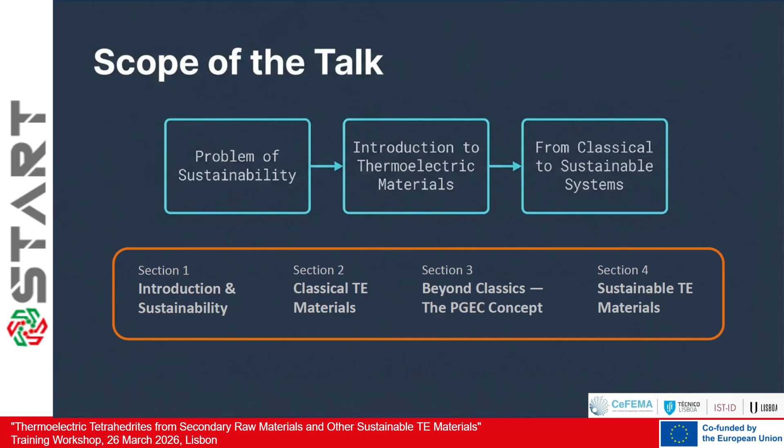So I'll give a small introduction to thermoelectric materials, really small because everybody knows about thermoelectric materials. And then I'll speak about going from classical to sustainable systems. And to do that, I divided this talk into 4 sections. The first one will be the introduction to the subject and to sustainability. Then I speak about the classical thermoelectric materials.

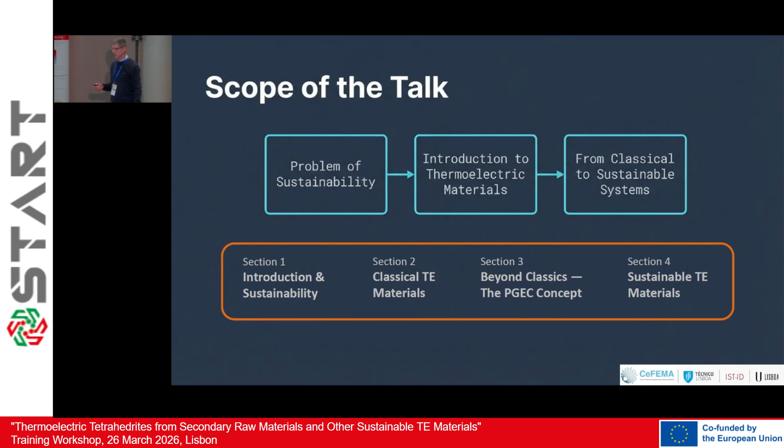Then I go beyond the classics, in particular with the phonon glass electron crystal concept that was really something that made the change. And finally, we will reach the sustainable thermoelectric materials. So, what about sustainability? What about the introduction? So, what we all want, for everything, is to have a sustainable development.

And for that, there are 3 main areas, which are the economy, the environment, and the society. Actually, the environment is the basis of everything. So we don't want to destroy our environment. We want to keep it. But we want to have economic growth to develop and give better conditions to the society. And this is quite hard, okay?

Because if you want to increase the growth of the economy very much, sometimes it collides with the environment, you destroy the environment. So we must be careful with these 3 areas if we want to have a sustainable development. And what about thermoelectrics? What can thermoelectrics give to that? Is it possible to connect thermoelectrics to this sustainable development?

Yes, in principle, yes, because one of the big problems of our development, of our society, is energy. You can feel it now, okay? Actually, most of the energy produced is still from fossil sources, something like 80%. So we have a problem of energy. And in fact, most of the energy produced is just thrown away as waste heat.

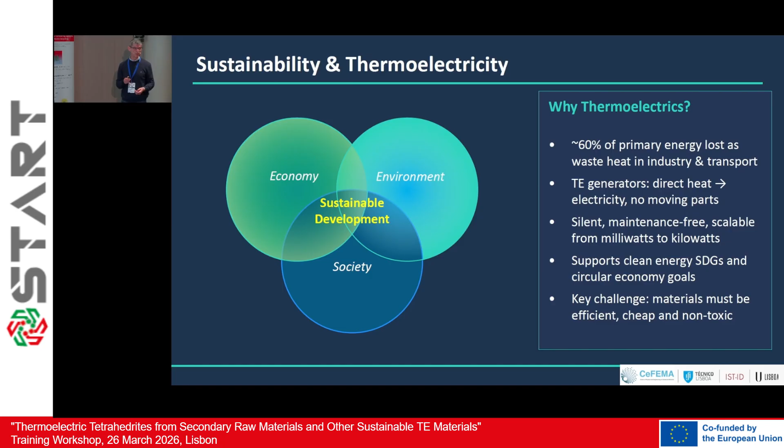So there are a lot of advantages, but there are also big challenges. One is the efficiency, of course. The efficiency is typically low. But also on the materials side, if you forget about the efficiency, which is low, as I said, the materials must be efficient, cheap, and non-toxic. So this is the problem. Okay? So let's look a little bit deeper at the waste heat.

If you look at that, you can see that there are different types of waste heat depending on the temperature. Most of the waste heat is at low temperatures. Something like between 45 and 50% of the waste heat is up to 300 Celsius. Basically it's chemical industries, houses, even the cement industry has a lot of heat losses in that region.

And the second one, at temperatures above 500 Celsius, is around 30 to 35% of waste heat, and you can see all the metallurgies are there. So if you really want to profit from that, the ideal is to profit from all of them, but it's necessary to have different types of materials. In our case, we have concentrated more on low temperature materials, which means up to 200, 300 Celsius waste heat losses.

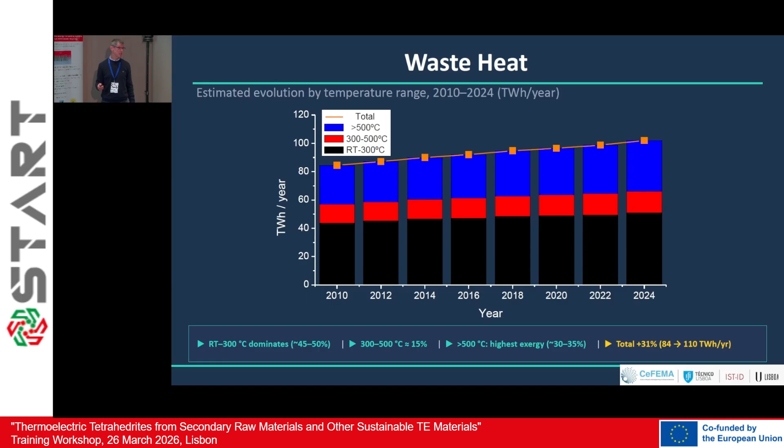So, concerning the potential of thermoelectricity for sustainability, as I said, something like 60% of the energy produced is wasted as waste heat, and this gives something like around 100 terawatt hours per year of losses. So it's huge. If you really think that it will be possible to profit something from that, even 1% or 2%, it's a lot. It really signifies something, okay?

And in fact, what we have now is figures of merit quite reasonable, I'd say. So for these sustainable materials, we have ZTs above 1, which, as you will see, even for classic materials, is what you usually get.

So we have, in terms of sustainability, the industrial waste heat recovery. We have several industries that have a lot of losses, but also the automotive and transport facilities. They have a lot of waste heat losses, in particular the internal combustion vehicles, which are still a lot of the vehicles that we have. Okay, forget Europe. Europe is a good example, I would say. Norway is a very good example in terms of electric cars. But if you go all around the world, we still have a lot of internal combustion vehicles. And these have a loss of 65% of energy.

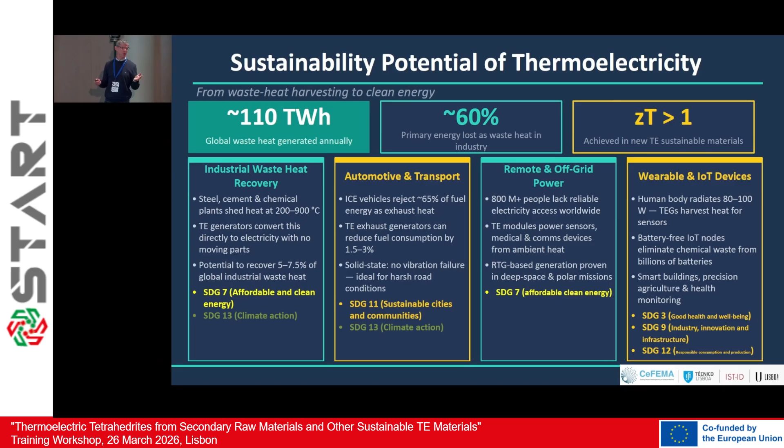Okay, so let's look at the thermoelectric module market and the evolution of the thermoelectric module market. You can see that the big part is still cooling at the moment. Cooling still dominates the thermoelectric module market, and this is okay because it was really very used for medical applications, for cooling of electronic devices, and this is still a big part.

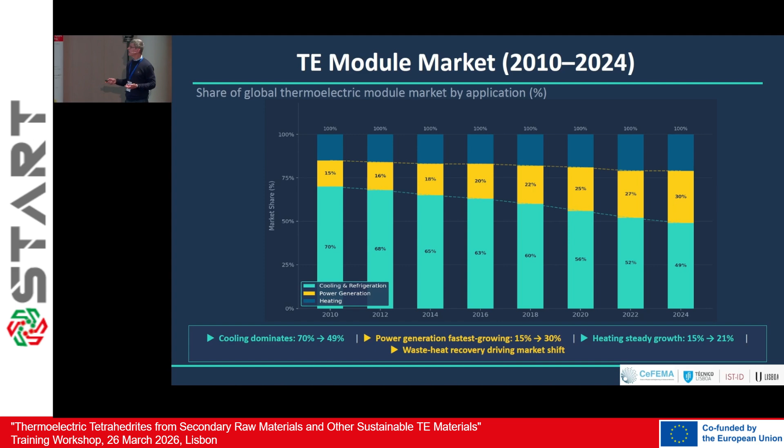So this is decreasing in percentage, but it's not decreasing in absolute values, because the module market is increasing really fast. But what we can see is that power generation is really fast growing, in particular because of the Internet of Things and wearable things. Well, not so much wearables, but in particular the Internet of Things. Okay? So it looks like thermoelectricity has a role, or can have a role.

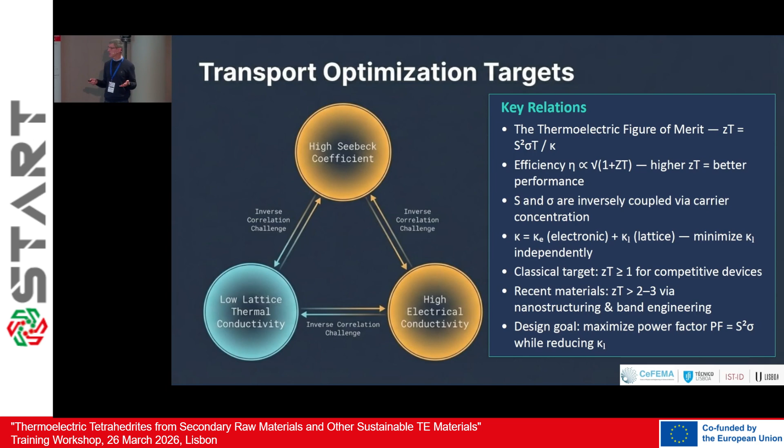But as you know, we have problems in terms of thermoelectric materials and devices, because thermoelectric materials are challenging to develop. There are inverse correlations between Seebeck coefficient and electrical conductivity, between electrical conductivity and low thermal conductivity, and between high Seebeck and low lattice thermal conductivity. So they play against each other, basically. To have it really working properly is not easy. But even so, it's possible to develop some materials that are good thermoelectric materials.

And this led us to the classical thermoelectric materials, which were developed until the 60s. There was a lot of work in the 50s and the early 60s by many groups, from America, from Russia, from Australia. And this allowed the development of relatively good thermoelectric materials by using different strategies. For instance, by optimizing the carrier concentration to the optimum value, something like around 10^19 per cubic centimeter, that really maximizes the power factor. And for this, it was possible to identify lead telluride and bismuth telluride as good thermoelectric materials.

Then also playing with the band gap, because all these materials are semiconductors, and optimizing this band gap, it was possible to maximize the power factor and to avoid bipolar conduction. In this case, also bismuth telluride, lead telluride, but also silicon germanium alloys were identified. Multi-valley band structure increases the effective mass, so increases the Seebeck coefficient, and in particular lead telluride was identified. Then also the high mean atomic weight reduces the thermal conductivity, and lead telluride and bismuth telluride are good examples.

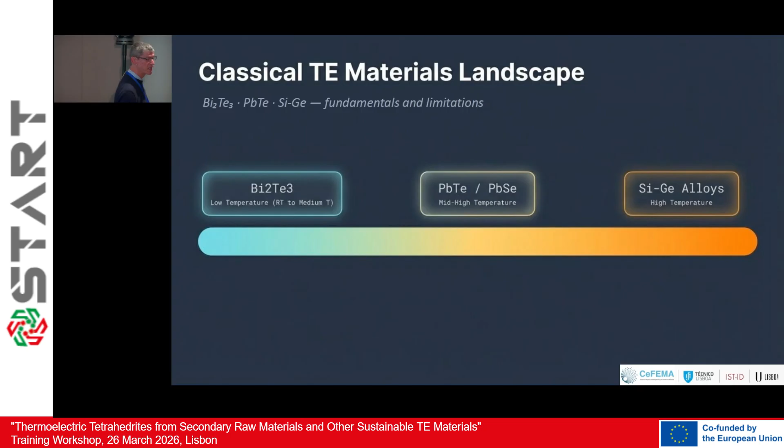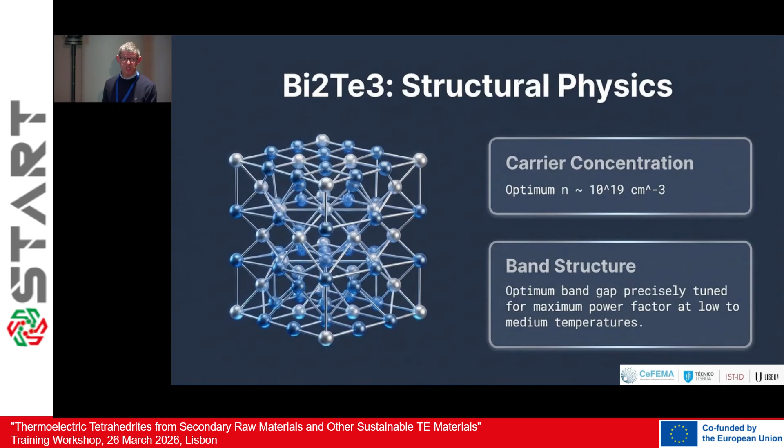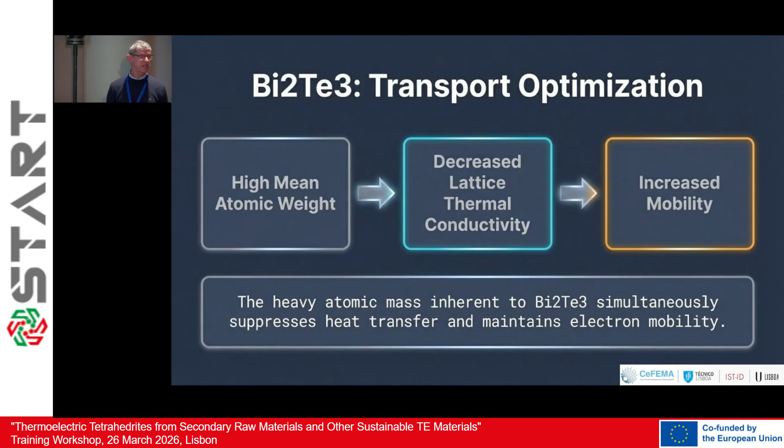Now looking a little bit deeper at each one. Bismuth telluride has a good carrier concentration and, as I said, an optimum band gap, which was possible to tune by changing the composition. It has a high mean atomic weight, which decreases the lattice contribution to thermal conductivity and does not affect the mobility so much. So it was good in this sense.

But it has a layered rhombohedral structure. It is a van der Waals compound, which means it is composed of layers. Within each layer the atoms are strongly connected, but between the layers the chemical connections are quite weak. So mechanically it is not really the best because of this.

So good band gap, high carrier mobility, and one thing which is very important: by changing composition, by doping, we can have N and P. So we can have both types of semiconductors, which, as you know, for devices is really an issue. We need both if you don't want to develop single-leg devices. We can reduce the lattice contribution to thermal conductivity. So they are quite good for Peltier coolers, but also for low to medium temperature range waste heat recovery.

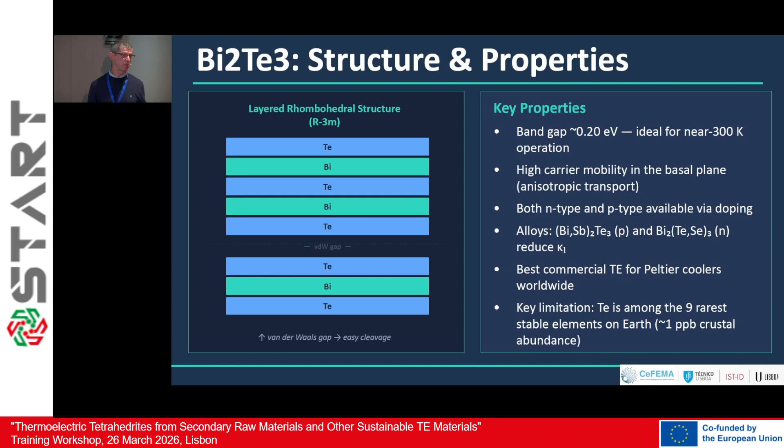But there are key limitations. One is the mechanical properties, as I said before, because the structure is quite anisotropic, and in that plane it is really brittle. And it has a lot of tellurium. Now it is not a big problem because tellurium is not used, it's just a waste of the copper industry. But for a broader use of these kinds of materials, it's a problem because it does not exist, point, okay?

So, lead telluride. As I said, it has a multi-valley band structure, is also a semiconductor, and it changes with temperature, so it remains close to the optimum band gap when you change the temperature. And we can make an alloy between lead telluride and lead selenide; chemically it remains basically the same, but you can decrease the thermal conductivity quite strongly.

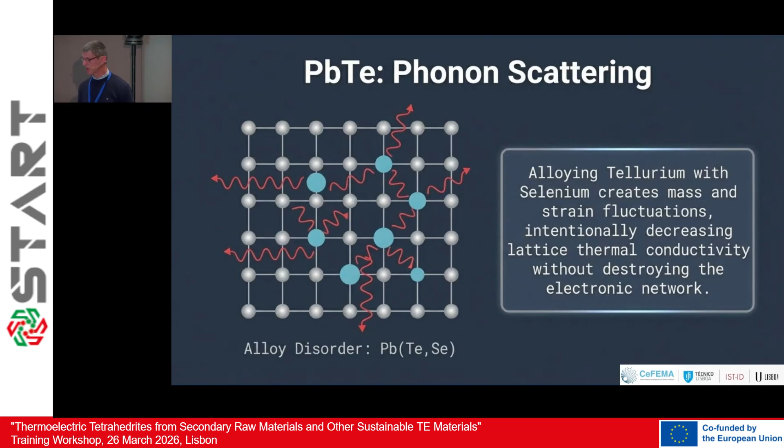It has a cubic structure, so this is good in terms of anisotropy. You cannot say that it's isotropic, but it's the least anisotropic that you have. As key properties, the best performance is between 700 and 900 Kelvin, so it's for this medium temperature range. It has a good gap and can be N-type or P-type, which is also very good in terms of coefficient of thermal expansion, because you are just playing with one material if you make a device.

So there is this band convergence, and one of the problems is the thermal conductivity, which even after alloying can be not so small, but by nanostructuring it can be really decreased, and in fact ZTs higher than 2 were obtained. I have doubts that we can keep it for a long time. That's another problem, but okay, for publishing an article, it's okay.

Again there is a critical limitation of tellurium and a critical limitation of lead, because, as you know, in Europe lead is considered highly toxic, and it's banned from many applications. Okay.

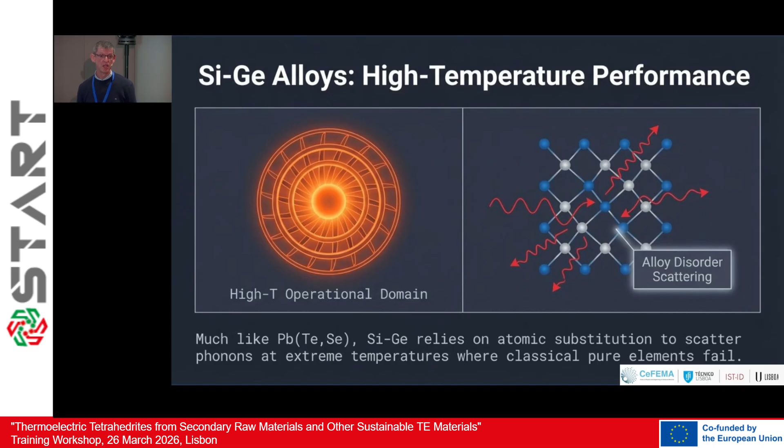Finally, silicon germanium. This is for you. Silicon germanium is really very good for high performance. They are alloys, so the alloy disorder causes scattering and reduces the thermal conductivity. If you measure the thermal conductivity as a function of composition, you can see that the minimum is in the middle, 0.5, 0.5, because of disorder, of course. And it's for high temperatures.

It was really very successful in a very niche application, which was radioisotope thermoelectric generators. This was a big success. You probably heard about the Voyagers, these spaceships that were sent far, far away. Voyager 1 has been outside the solar system for a while, and it's still working.

If you want energy sources to send these spaceships far away from the sun, you cannot use solar energy. The best possibility is to use these radioisotope thermoelectric generators, and they should be really very reliable, because if there is a problem, you cannot go there to solve it. In the case of Voyager, Cassini, New Horizons, these are tens of years without any problems and still working.

So this was based on silicon germanium. Now there are attempts to use other types of materials, not so successful. So I think that NASA is returning again to silicon germanium. And in the case of silicon germanium, the fact of alloying silicon with germanium decreases the thermal conductivity. So there is the operation range at high temperatures. And again, we can, by doping, have a p-type and an n-type semiconductor.

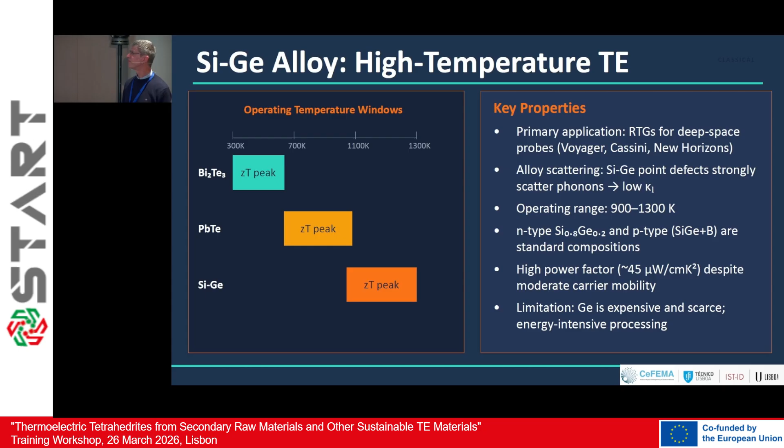The power factor can be very high, and usually it's very high. And the thermal conductivity is low, but not so low. And the main problem is the price. Germanium is an issue, because germanium is very expensive. So I know that there are attempts to decrease the content of germanium, keeping the properties. So this could be one possibility for high temperature applications, still, actually.

So we have several limitations for the classical thermoelectric materials. One is the toxicity, okay? Lead is toxic, but also tellurium is toxic. Bismuth is not so much, but lead and tellurium are not so good. The scarcity: tellurium is rare. Germanium is also rare, okay? It's not so available. The high cost: 1 kilogram of bismuth telluride is around $100. But if you go for silicon germanium, it's almost $700 per kilogram. So the price is quite large.

And then there is the need of processing, in particular for bismuth telluride. It's necessary to do zone refining to have a strongly textured material, because of these anisotropic properties, or even single crystal. Actually, the single crystals are the best ones, but are also the most expensive to prepare, and in terms of mechanical properties are also not exactly the best. So bismuth telluride, which is the most widespread classical thermoelectric material, is brittle.

And finally, supply chain. Bismuth, tellurium, germanium are classified as critical raw materials by Europe and by the United States. Okay, so we have problems, and that was one of the reasons why thermoelectricity did not explode. Price is high, there are problems on supply chains, and of course, the efficiency is also not so big. But if we can reach a very low price, it's a question of price. If we got the same kind of properties of these classical thermoelectric materials, but at much lower price, that would be one step to solve it.

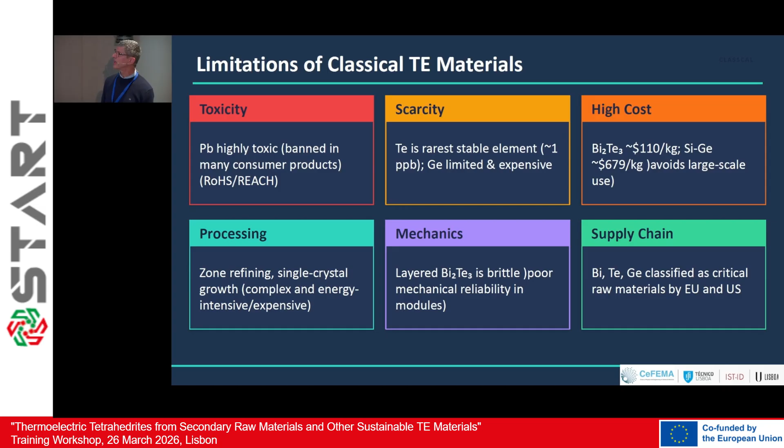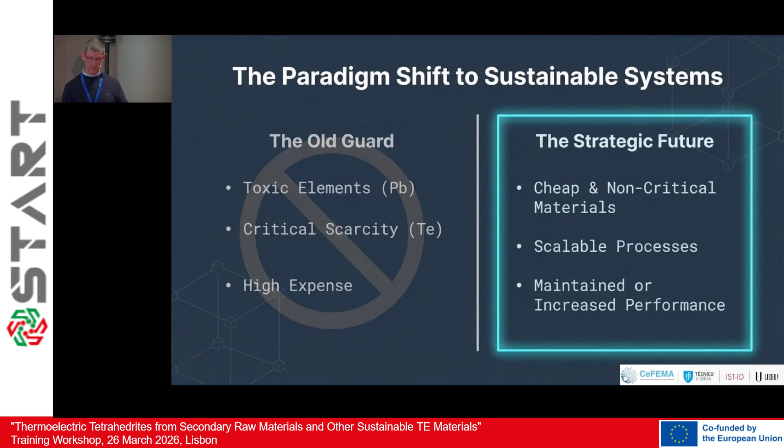So we have these old guard thermoelectric materials, and we want to go to the future thermoelectric materials, which means cheap, non-critical materials, scalable processes, and either maintain or increase the performance of those materials. And in fact, for a while, there was the discovery of these three families of thermoelectric materials: bismuth telluride, lead telluride, and silicon germanium. And for something like more than 30 years, it was kept like that.

But in the middle 90s, there was one guy, Slack, that came with the phonon glass electron crystal concept. And this was really something that changed things in thermoelectricity. Basically, he came with the idea of having materials that behave for phonons as a glass, but for electrons as a crystal. So basically, they tried to find materials where it was possible to decouple electronic and thermal transport, and where some atoms could rattle in cages. So there are some strategies like cage filling, complex unit cells or solid solutions.

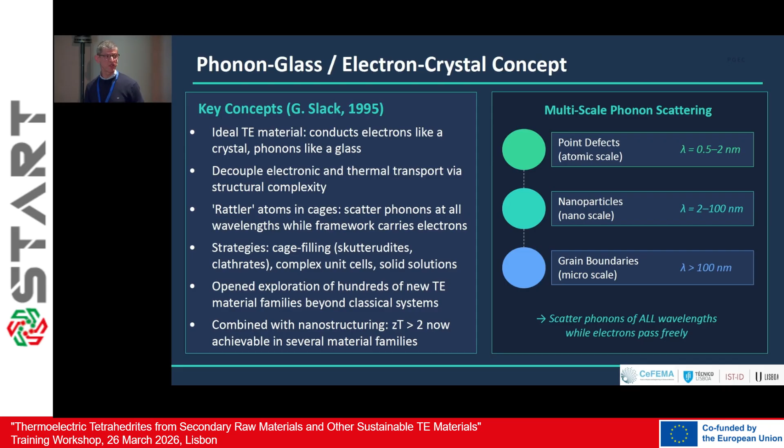And in fact, this opened the exploration of many other types of materials, and many materials were discovered after that. And also nanostructuring came into the room, because many new technology advances in nanosystems appeared in the 90s. Moreover, there was the idea of multiscale phonon scattering, from point defects until grain boundaries, in order to scatter phonons with different energies.

So I'm just going to present here two examples. The example of skutterudites, which are indeed really being developed as devices. The skutterudite is a cubic structure. It's a cage type structure where you have in the middle a big void. In the empty skutterudite, this void is empty. Skutterudite is also a mineral. So this is the empty one, cobalt antimony 3, CoSb3.

But this void can be filled. And like that, you can reach a composition of RM4X12. And this atom, which is in the void, is not strongly connected to the other atoms, and that allows it to rattle inside that box. And with that, it was possible to reach quite good figures of merit, ZT around or higher than 1.5.

But there are several limitations of this. One is it relies on antimony. Antimony is not so bad as lead, of course, but it's not exactly the best in the world. And actually, the best rattler atoms are rare earths.

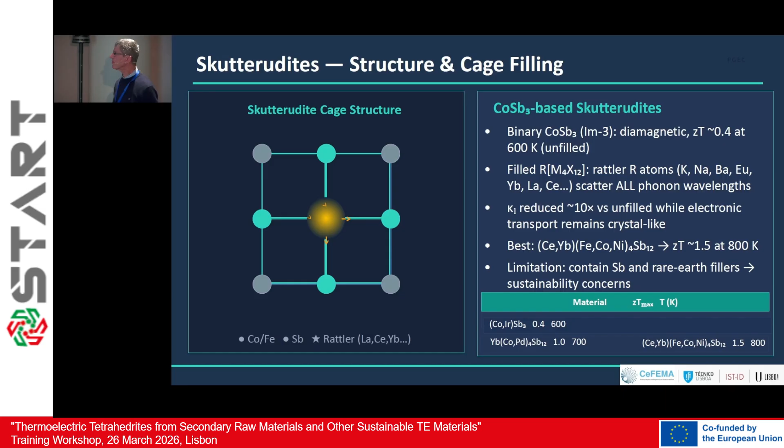Okay, the second family that I want to speak about is Half-Heusler. These are basically intermetallics, which are also cubic and are based on two sodium chloride structures, one inside the other, where in one of the structures just half of the positions are occupied. And that opens a gap, and even if you think that it's an intermetallic, it's a semiconductor.

So vacancies in one sublattice open a band gap, so it becomes a semiconductor. And this has a quite high effective mass, which means it has a quite large Seebeck coefficient, and the best results are also with figure of merit higher than 1.5. The power factor is quite reasonable. The thermal conductivity is not so big, but we can decrease it by nanostructuring. And again, I have some doubts that we can keep this nanostructure for a long time.

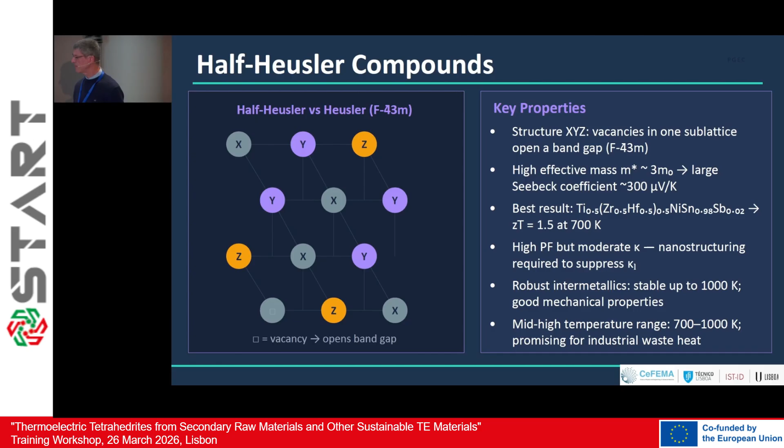So it is basically for the mid to high temperature range in terms of application. So it's promising for replacing lead telluride. Okay? But we want more than that. Actually, we want to go to something that is a viable thermoelectric, which means a high ZT, but also based on earth abundant elements, non-toxic and stable. Okay, this is what we want.

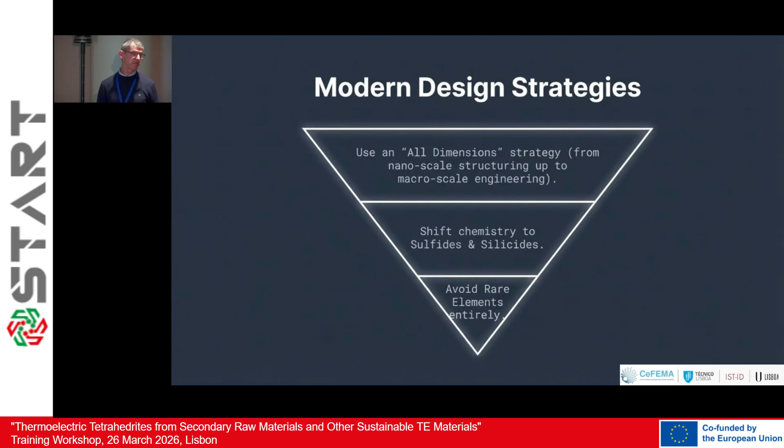If we really want to go to sustainability, we need to go to that, and moreover, something that can be recyclable. Of course, we can continue using the strategies that were used to develop all these classical and new types of materials, like for instance the all dimensions strategy, but shift the chemistry to really spread elements like sulfides and silicides, and for sure avoid rare elements or elements that don't exist so much.

So if you want to go to a sustainable thermoelectric material, we want to have a high ZT to be competitive with the existing materials. We want these materials based on earth abundant elements with at least 100 ppm. Well, it's a limit, it's a number. Non-toxic, so we don't want it based on lead or mercury or cadmium, elements that are really not so good in terms of toxicity.

Low cost, so the raw material is affordable for industrial scale. And of course, the process of preparing should not be too complicated, quite simple in order to be scalable. And of course, the materials should be stable. You cannot just use it once or for half a year and then it's dead. Okay, so this is what you really want.

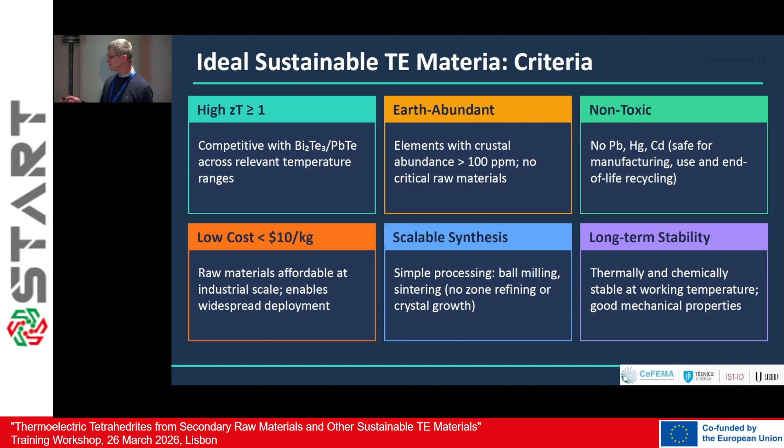And let's start from the elemental abundance, considering silicon as a reference. Silicon exists all around. There are a lot of silicates, quartz, whatever. It's really abundant. It's not as abundant as oxygen, but it's really abundant. So let's take it as a reference and look at other elements that can, in principle, be used for thermoelectricity. Let's look, for instance, at magnesium.

Magnesium is perfect. There's a lot of magnesium in the crust. But also iron. Even copper and sulfur are not so bad. Of course, if you put some antimony there, it should be a minority, because there is not so much antimony in the crust. But avoid bismuth, completely avoid tellurium, and you need to avoid lead, because at least in Europe you cannot use it, forget it. So we have here several elements that can be used.

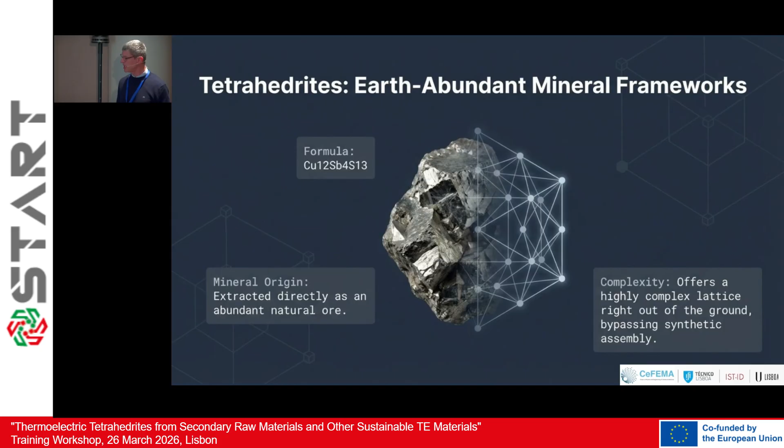And this led us to what Philippe was presenting and what was the subject of this START project, tetrahedrites. If you look at tetrahedrites, basically it's mainly copper and sulfur, which, as I showed before, are quite spread. They are not so rare. And then a little bit of antimony, one part in 7. So it's not so bad. And in fact, it's all around us, as Philippe showed.

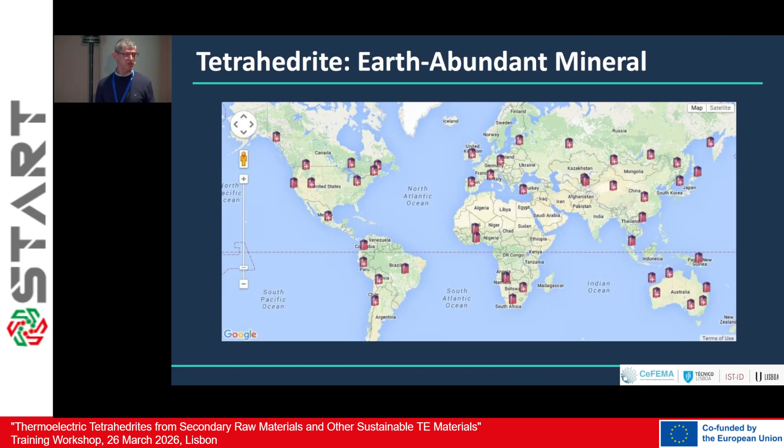So it's not a problem for any part of the world. It's really spread across the whole world. So it's earth abundant, and it is a mineral. Of course the mineral, as Philippe also showed, is not the best one, so it's necessary to compensate and play with synthetic tetrahedrites to get the proper properties. But even so, it's a good possibility.

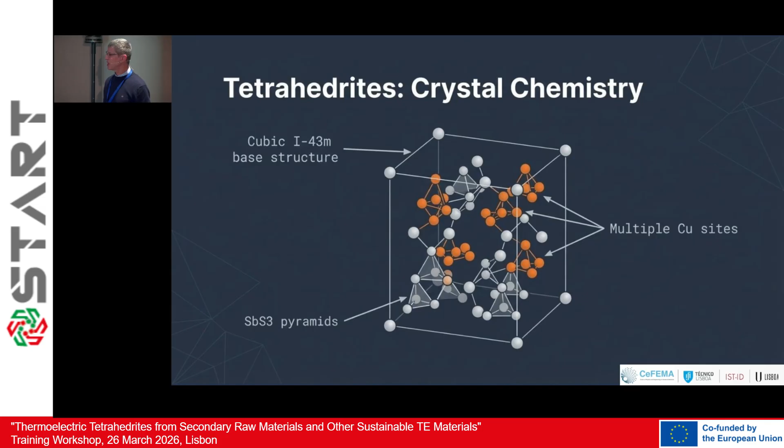It's a cubic structure, which means that it's good in terms of anisotropy, and has two copper sites and these antimony sulfur pyramids. Basically, it is like Slack's proposal of the phonon glass electron crystal. In fact, we have a copper that rattles there. It's not very strongly connected to the other atoms.

These atoms are located in a planar trigonal place, and they scatter the phonons quite strongly, and moreover there are lone pairs that also play a role in scattering of phonons, which means that it can really have a very low thermal conductivity. So one of the main advantages of tetrahedrites is really the low thermal conductivity that is observed in

this material. And then, of course, we can play with composition, because this is the original composition, copper 12, antimony 4, sulfur 13. But we can play a lot, in particular in the copper, but also in antimony and in sulfur, substituting one transition element for another, so copper for another transition element. So it's possible to tune the properties, to optimize the properties in order to get better figures of merit. And in fact, as was shown, figures of merit around 1 are possible to get.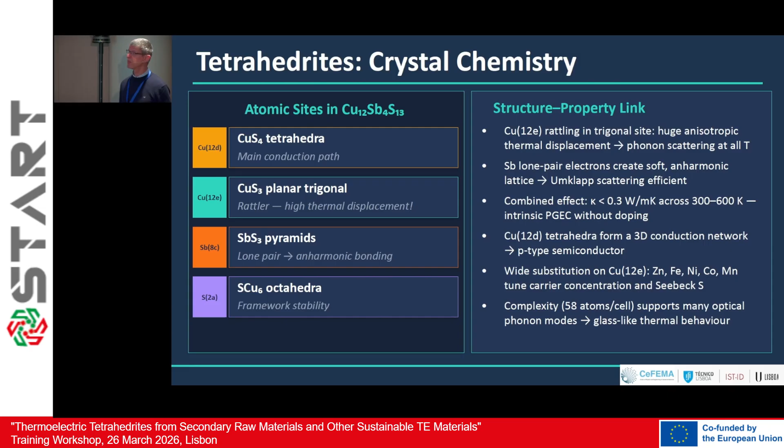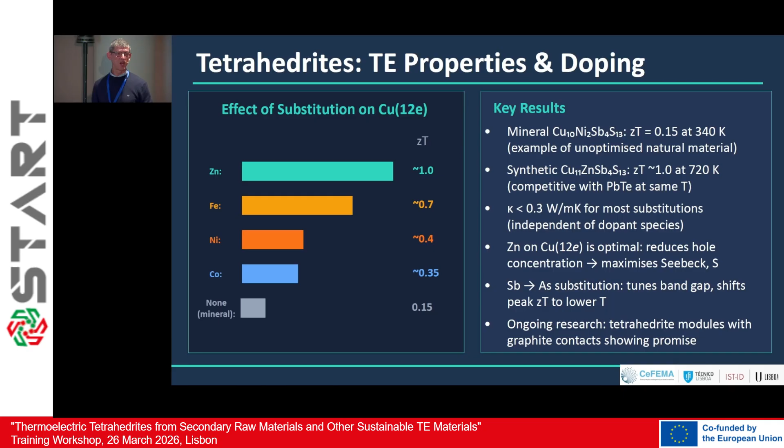Okay. So this is basically what I've said. So it's possible to substitute and to get proper figures of merit, even if the mineral can have a low figure of merit. So tetrahedrite seems to be one possibility. But there are other possibilities. And as I said, magnesium is also widespread. So there exists a lot of magnesium.

So I'm just going to look at 2 families. I'm not going to look at the magnesium antimonide. I'm just going to look at the magnesium silver antimony, which in terms of price, of course, you can see is not exactly the best in the world. Okay? And there are other problems that it presents, but even so, it's interesting to check what the properties of this material are. And then magnesium silicide, or based on magnesium silicide, so with solid solutions, in particular with tin or with bismuth also.

So let's look at the alpha magnesium silver antimony. So it's a p-type. So one is p-type, the other is n-type. It has a complex ternary tetragonal structure and a high Seebeck coefficient. However, it's quite sensitive to the synthesis. It can be prepared in different ways. We basically have used ball milling and electric current assisted, some kind of SPS. So they had quite reasonable ZTs. But we also developed a method to avoid the ball milling just by induction melting and then by normal hot press. So it's one possibility.

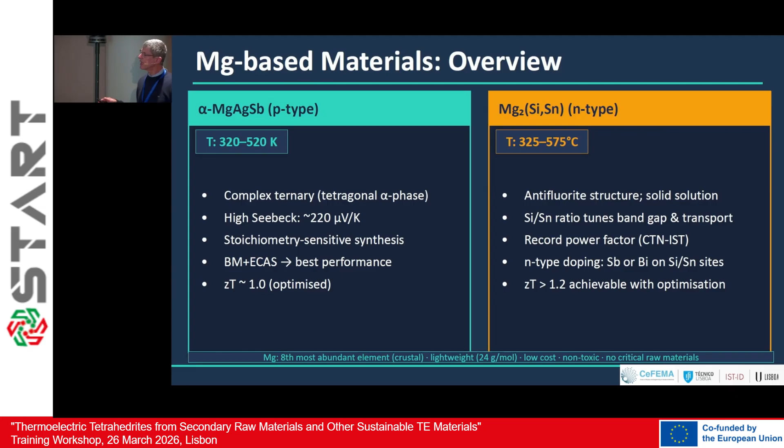And then going to magnesium silicide, it has an antifluorite structure, and can also be used as a solid solution. Actually, it's necessary in order to tune the band gap. It has a quite good power factor, and it was possible to achieve with optimization ZTs higher than 1.2, close to room temperature. Okay.

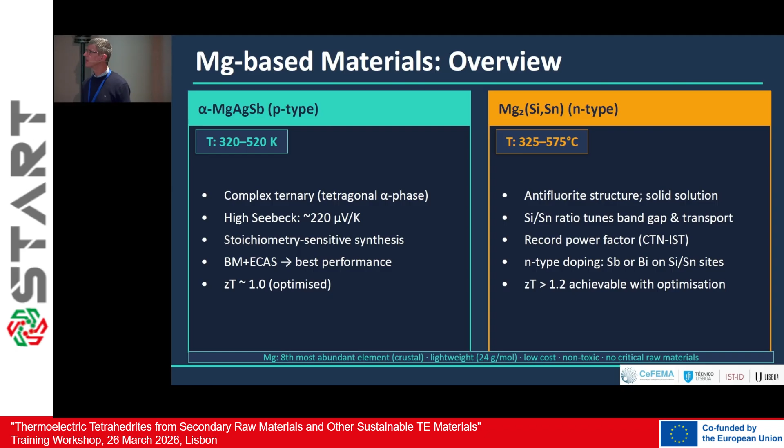So, looking deeper at magnesium silver antimony, it's not so easy to work with this material because it has a quite complex chemistry. The phase diagram is not so clean. There are several impurities that can appear and usually appear in your material. And even the 111 compound has several phase transitions depending on the temperature. The best phase for thermoelectricity is the alpha phase. But we have one phase transition at 290 Celsius to the beta phase, which is metallic, and then at 360 you get the gamma phase, which is very stable. So it's usually hard to get rid of it when it is formed.

So the stoichiometry control is really essential, in particular playing between magnesium and silver is really important to get the proper material for thermoelectricity. This is actually not exactly the best composition. This is silver 0.97 and antimony 0.99 something, okay? So it is a little bit less than one silver there. And actually, there is a narrow zone in the ternary phase diagram where it is possible to prepare the proper samples.

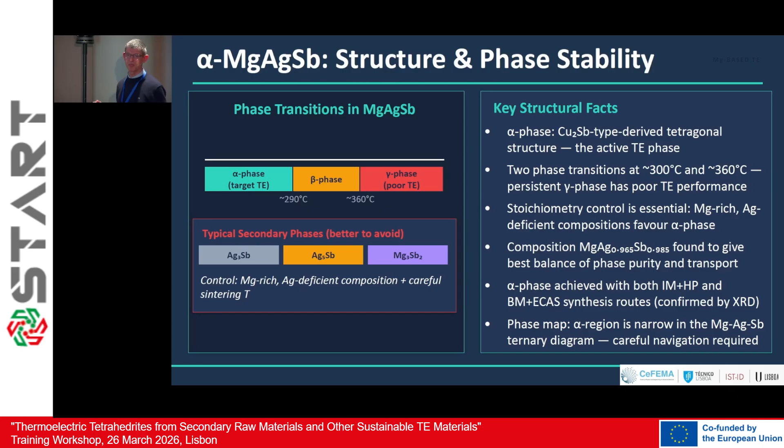Okay, now going deeper again for the magnesium silicide, we can tune the band gap by playing with the ratio between silicon and tin. So it is possible to tune the band gap between 0.35 and 0.7, which is quite large. So it's possible to have large Seebeck coefficients, and actually in our case we got the record, higher than 42 microwatts in this temperature range, so at low temperature. So it's really possible to get proper power factors.

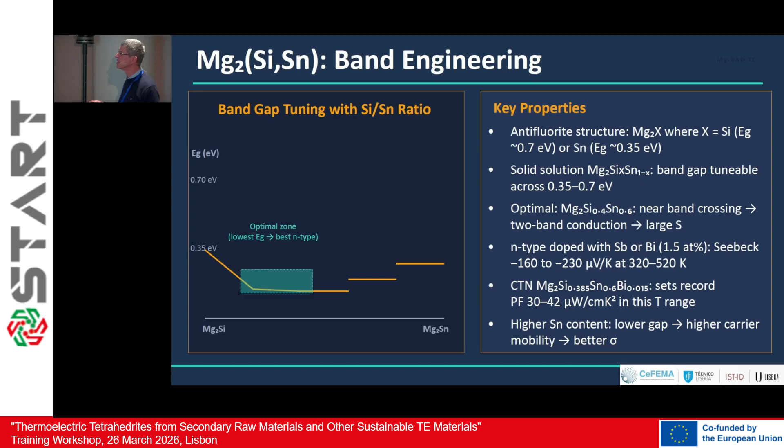And so that's it. So these, I think, are really something in terms of sustainable materials for the future. The tetrahedrites are P-type materials; there was a big effort trying to get N-type, but it was not really successful. So it's a P-type material. The magnesium silver antimonide is also a P-type material, but the magnesium silicide is an N-type material. So we can play between them to get proper devices, but we have problems with these magnesium-based materials.

We have the problem of volatility of magnesium. Magnesium is quite reactive; it not only evaporates and sublimates very easily, but also reacts very easily. In the case of magnesium silicide, if you come just from melting, you can have phase separation. In the case of magnesium silver antimonide, you have the problem of several phase transitions depending on the temperature. And magnesium reacts very much with everything, in particular with oxygen, so it's necessary to make the synthesis in an inert atmosphere, in particular if you use ball milling.

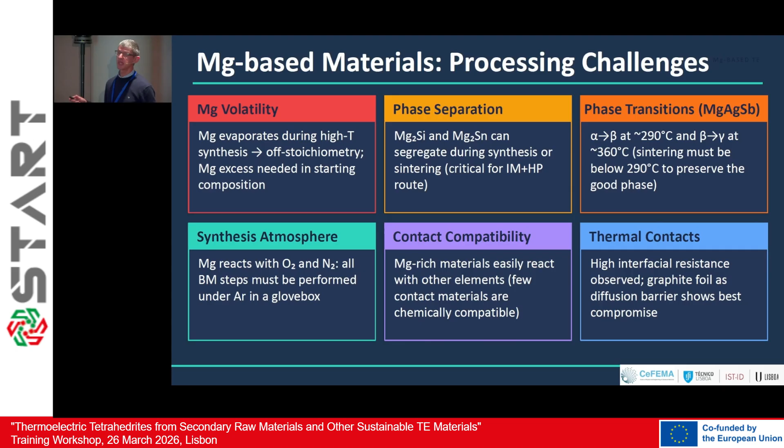And because of its reactivity, it's not easy to find the proper diffusion barriers or contacts with this kind of material, and not only the electrical conducting contacts, but also the thermal contacts. So there are still some challenges, in particular for developing devices that will survive for long periods.

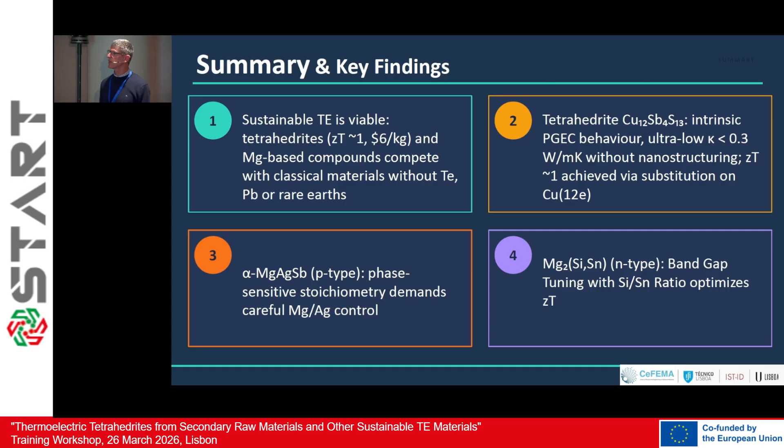So finally, we think that sustainable thermoelectrics is viable. If you look, for instance, at the price of the raw materials for tetrahedrites, they are less than $10 per kilogram, which is really very cheap compared with bismuth telluride, and of course don't compare it with silicon germanium because it's really very expensive. In tetrahedrites we have ultra-low thermal conductivity. In magnesium-based materials, it's possible to get high power factors, and the band gaps can be optimized. We have this sensitivity to the stoichiometry, but it's possible to control it by playing with the ratio between magnesium and silver.

So to finish, future directions and research outlook. I think that we still need to play a little bit more on the materials themselves, in particular if you change the way of preparing them. But it's also possible to get better properties with nanostructuring. Don't forget that here we are dealing with materials that will work at not so high temperatures. So it is possible that we could keep the nanostructuring if you play it well, because we don't have so much diffusion at the working temperatures.

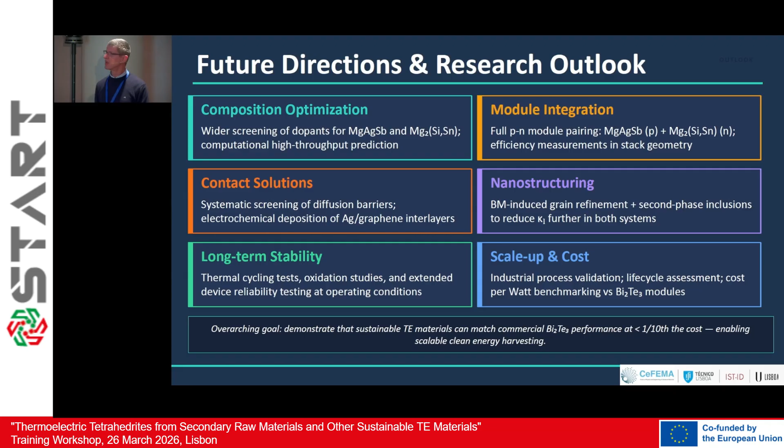But in terms of technology, there are a lot of challenges: in terms of module integration, contact solutions, long-term stability, and scale-up and cost. So if you really want to develop systems that would be useful as sustainable thermoelectric devices for the future, the technology part is really an issue. And with that, I finish, and I thank you for your attention. Thank you very much.